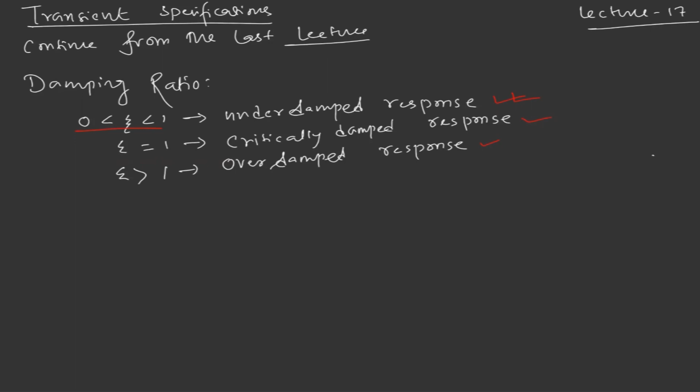This is the condition generally we use for aircraft control system. Now I'd like to highlight why we have to consider the damping ratio in this range. Let me highlight a few important points. The first point is faster response.

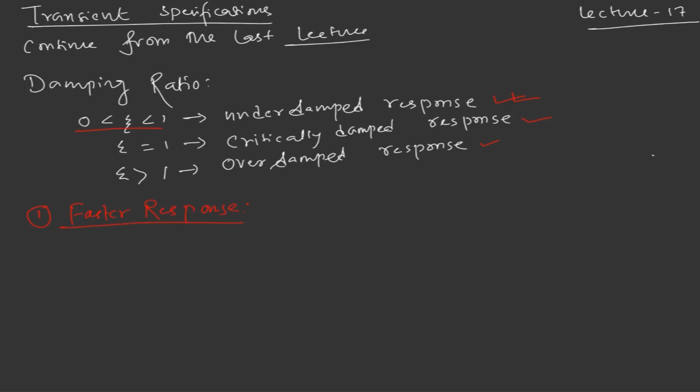Underdamped systems respond more quickly to changes in input or disturbances compared to overdamped or critically damped systems.

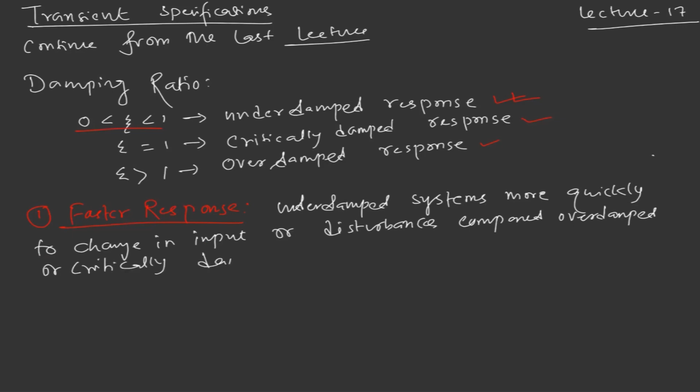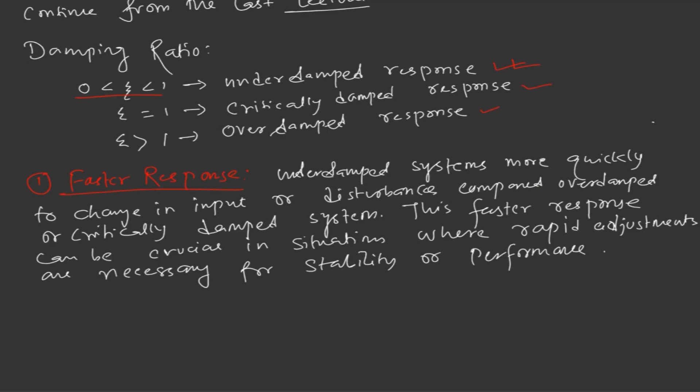This faster response can be crucial in situations where rapid adjustments are necessary for stability or performance. This is one reason why you have to consider the underdamped system.

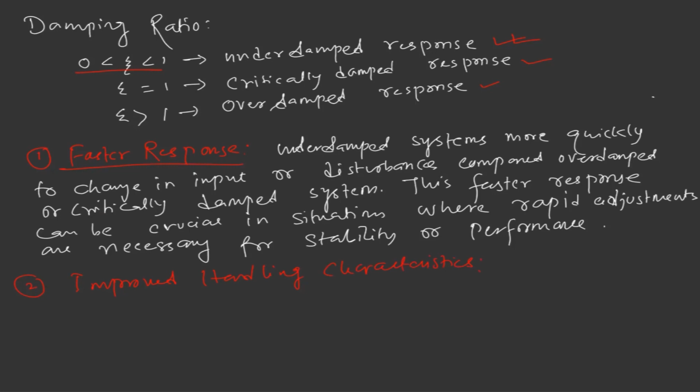Second, improved handling characteristics. Under this, let me write: an underdamped response can contribute to better handling characteristics.

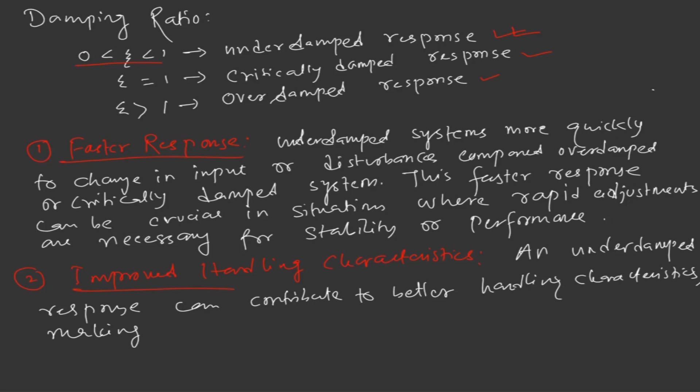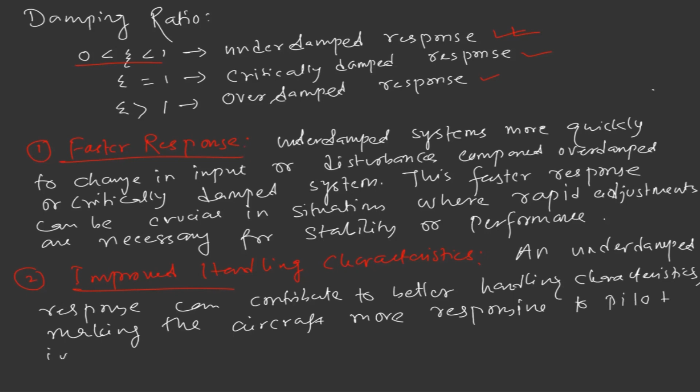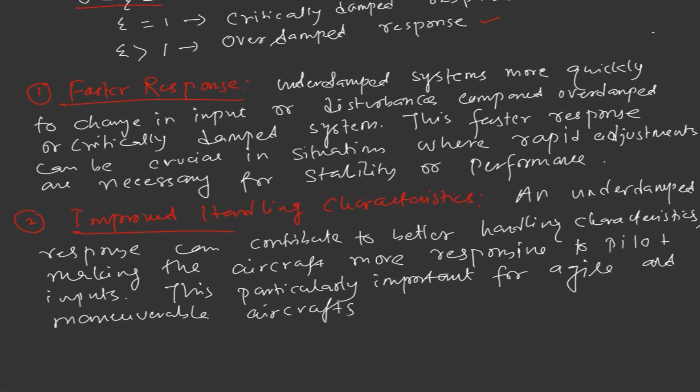This makes the aircraft more responsive to pilot inputs. This is particularly important for agile and maneuverable aircrafts. This is also a very important point, why you have to assume the damping ratio in that range.

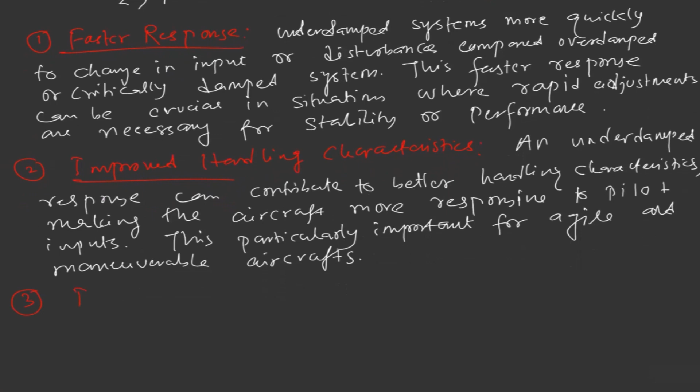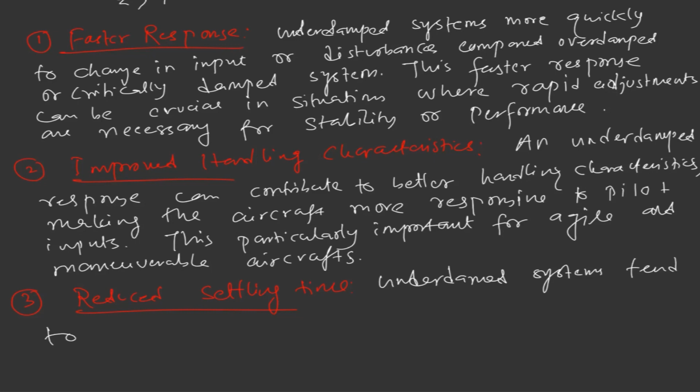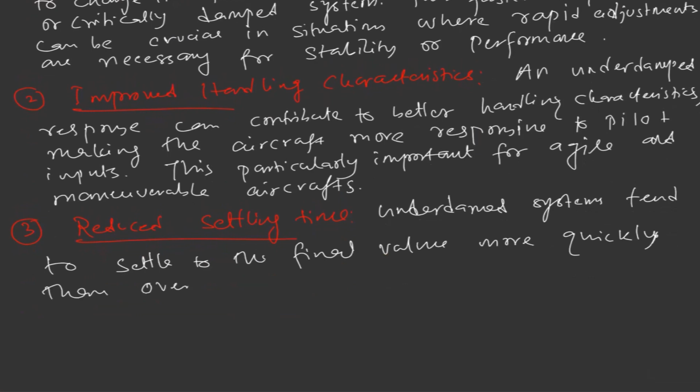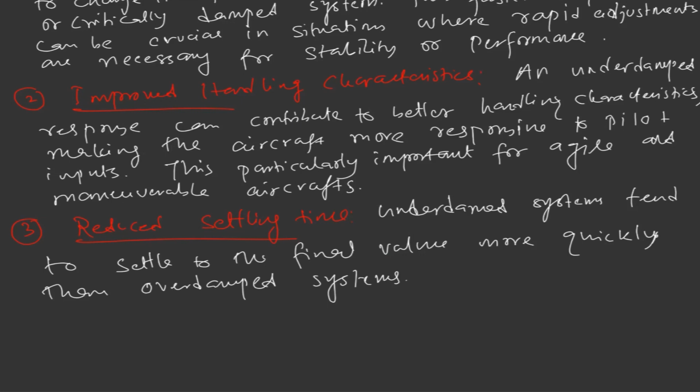Third point, reduced settling time. We'll discuss what settling time is very soon. Under this, underdamped systems tend to settle to the final value more quickly than overdamped systems. This characteristic is also desirable in applications where minimizing settling time is a priority.

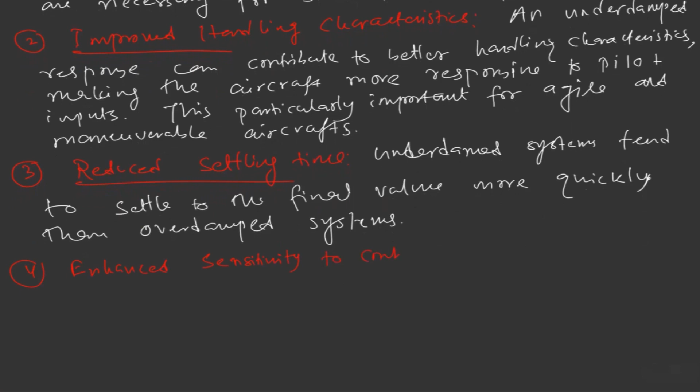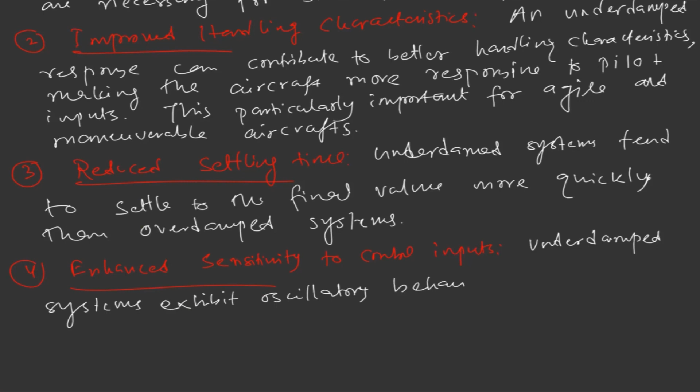Fourth point, enhanced sensitivity to control inputs. Underdamped systems exhibit oscillatory behavior. We've already discussed how this oscillatory behavior arises for the underdamped system.

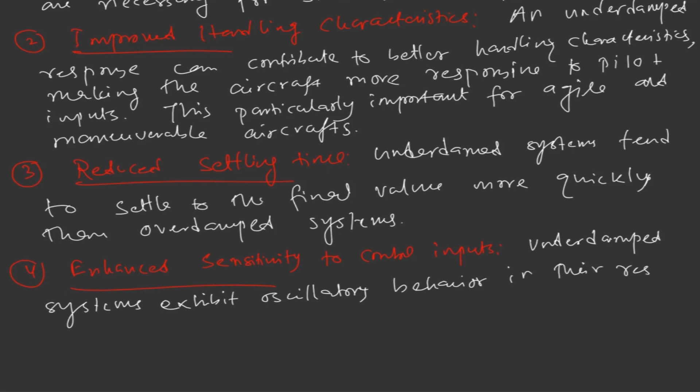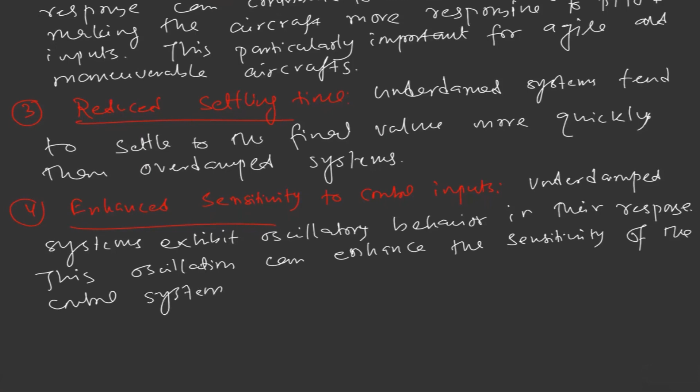These oscillations can enhance the sensitivity of the control system to small inputs. It's a very, very important point. So if you use this kind of system, the sensitivity of the control system to small inputs will be increased, enhanced, allowing finer control.

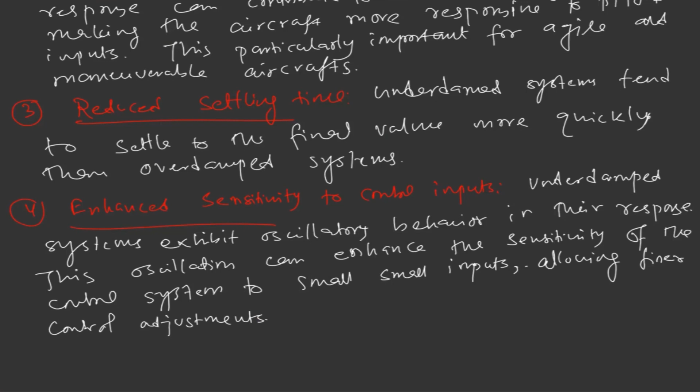And the fifth point we can write is stability margins.

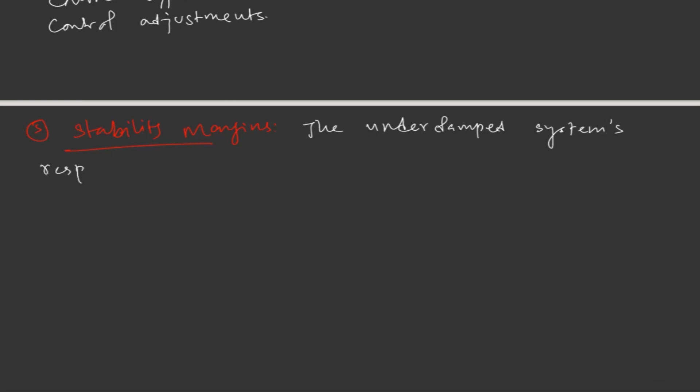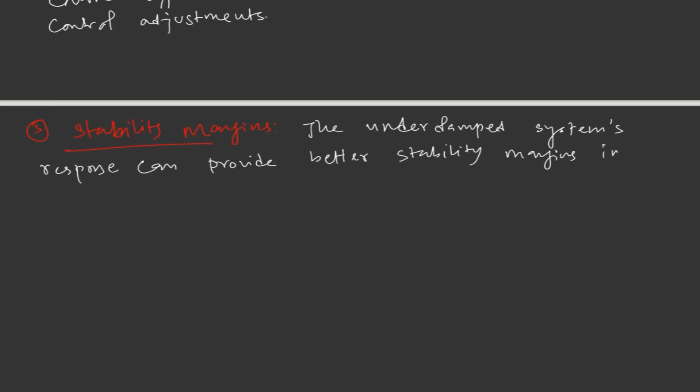The underdamped system's response can provide better stability margins in certain situations, making the system less prone to instability.

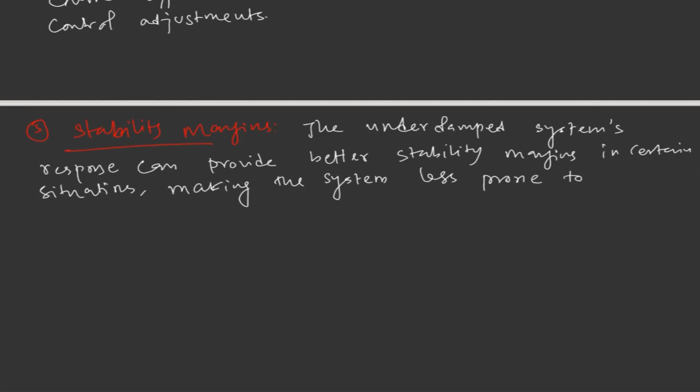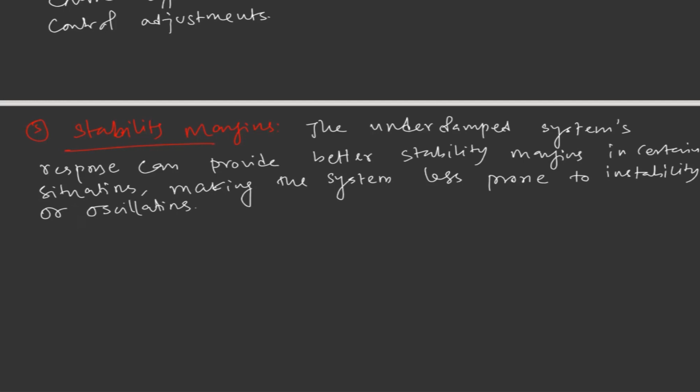So these are the points why you have to consider the damping ratio in this range. But it also depends on the situation in some cases; mostly we generally consider the damping ratio in this range. Another reason could be control authority: if you want a higher damping ratio, the control authority requirement will increase, because to provide that kind of damping to the system, you should have that kind of control power in the system. That is another possible reason.

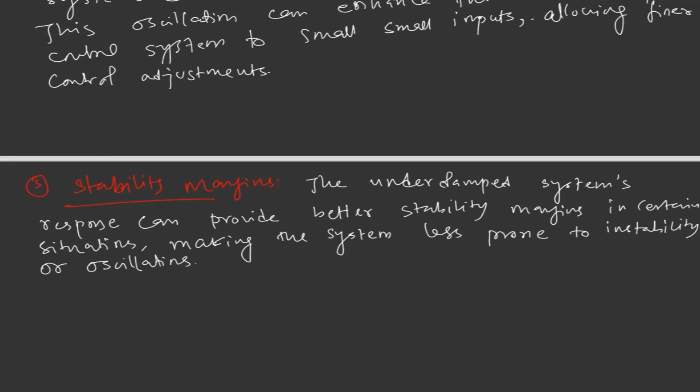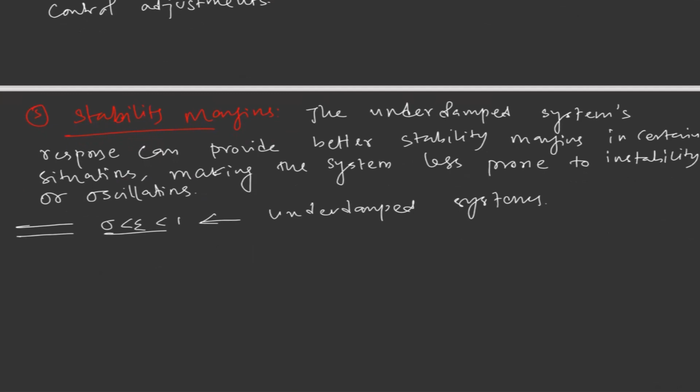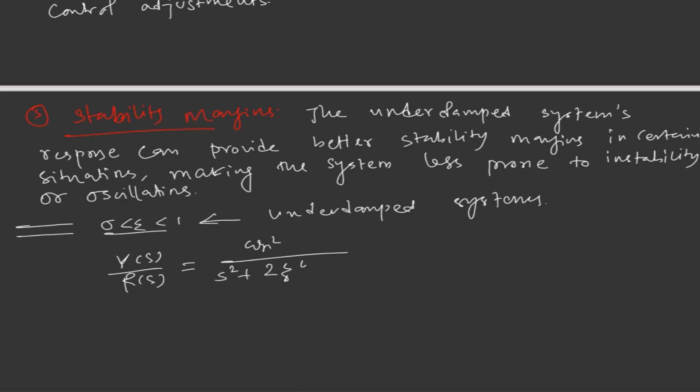Okay, let's go back to the dynamic system we considered before. We had the transfer function. Now onwards we'll consider the damping ratio between 0 and 1, the underdamped system. Based on the above points, we are going to consider the damping ratio should be in this range. Now, the transfer function we had is Y(s)/R(s) equal to omega n squared divided by s squared plus 2 zeta omega n s plus omega n squared.

As we discussed, we'll consider the step command in the system. So we'll assume R(t) equal to 1, a step command.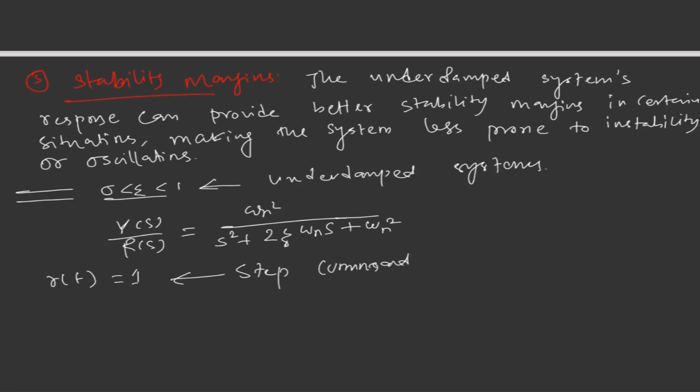We'll see how the response is going to be for this step command. If you take the Laplace transform, R of s equals 1 upon s. For this R(s), it's the step response because the command is 1 by s, a step command.

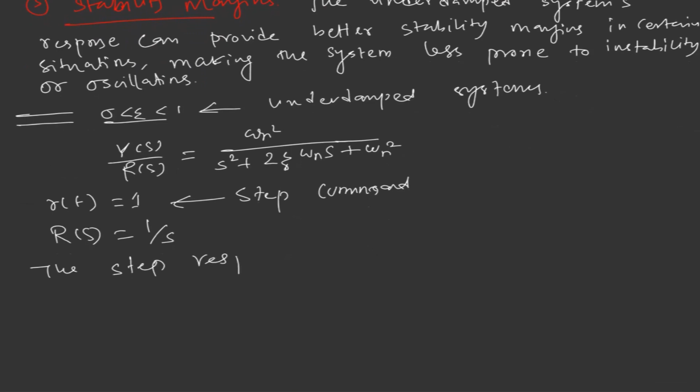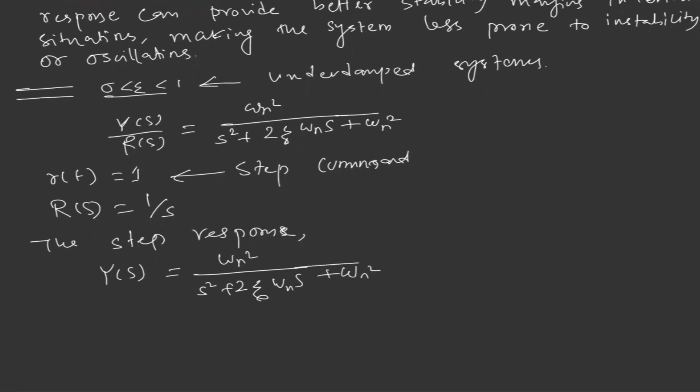The step response is given by y of s equal to omega n square divided by s square plus 2 zeta omega n s plus omega n square, into 1 upon s. Now if you use the partial fraction approach, we can expand y of s in a partial fraction.

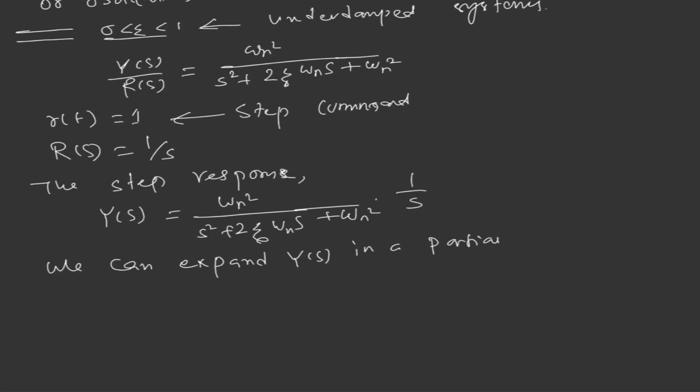y of s equal to 1 upon s minus s plus 2 zeta omega n divided by s square plus 2 zeta omega n s plus omega n square.

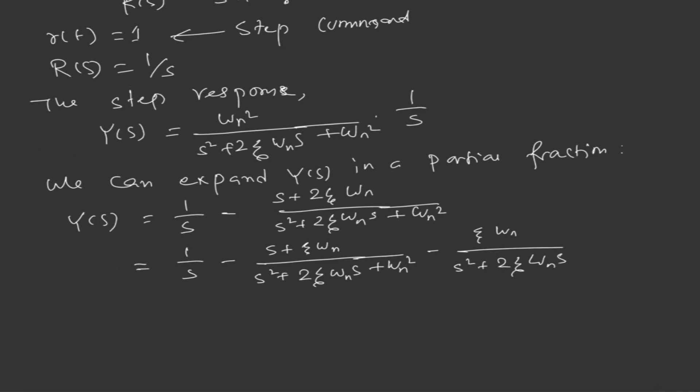Further, we can extend this term and write it as 1 upon s minus (s plus zeta omega n) divided by (s square plus 2 zeta omega n s plus omega n square) minus zeta omega n divided by (s square plus 2 zeta omega n s plus omega n square). So we can expand this expression into this form.

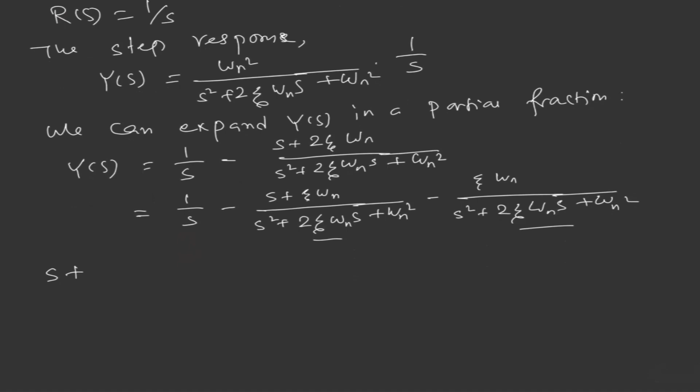Now let's compute the denominator part in this term, and we can expand that term again. We're trying to simplify this expression so we can apply the inverse Laplace transform and get a nice form. S square plus 2 zeta omega n s plus omega n square equal to, we can write s square plus 2 zeta omega n s plus...

...zeta square omega n square plus omega n square minus zeta square omega n square. We can write it in this form.

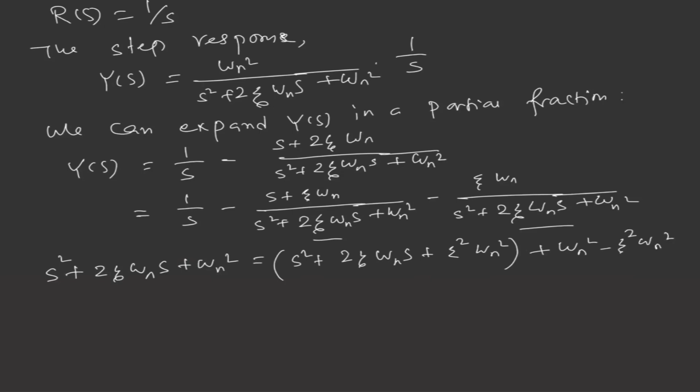From this we can further write (s plus zeta omega n) square plus omega n square common, taking 1 minus zeta square.

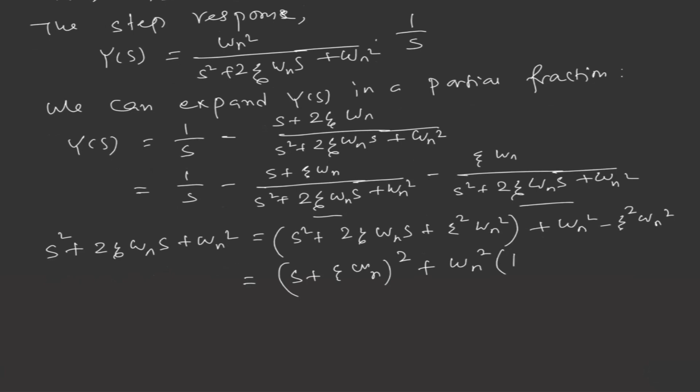From this we can write further, we already know omega d equals, for the underdamped system, omega n root over 1 minus zeta square. That's the expression we had. So if we take omega d square, we can write omega n square into 1 minus zeta square.

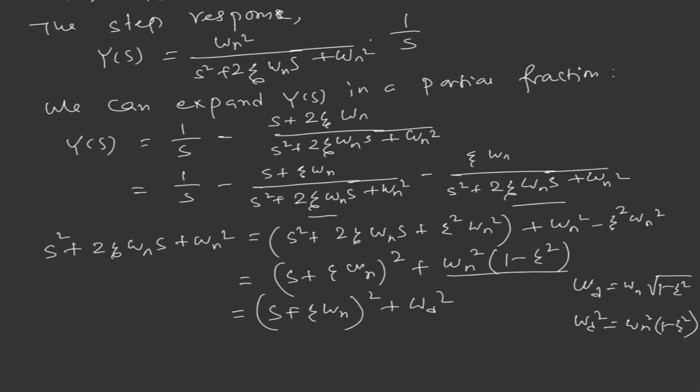So in place of this, we'll substitute omega d square: (s plus zeta omega n) square plus omega d square. Now if you substitute this expression in the equation, let me write this as equation number 1.

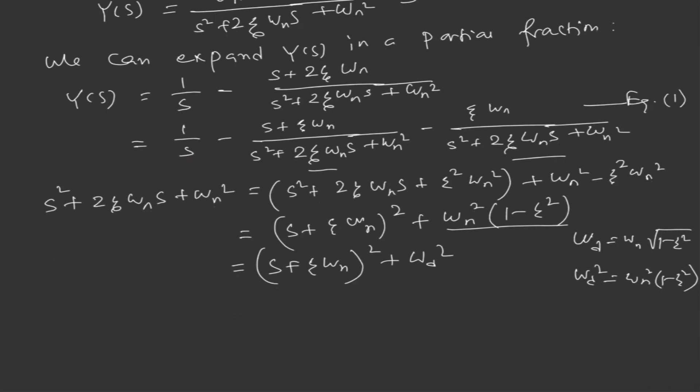Substituting the above expression in equation 1 yields: y of s equal to 1 upon s minus (s plus zeta omega n) divided by (s plus zeta omega n) square plus omega d square.

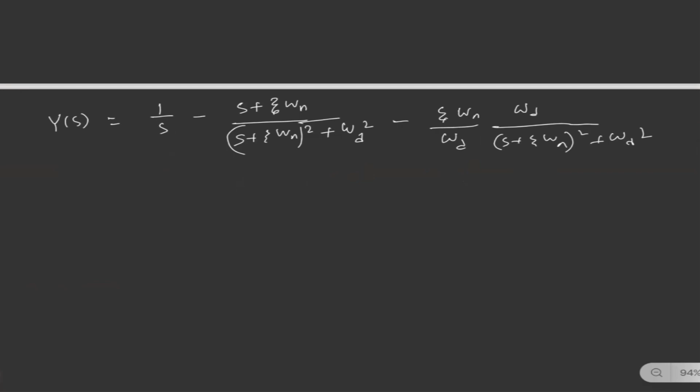...and minus zeta omega n by omega d, over (s plus zeta omega n) square plus omega d square. So we multiply omega d here on both sides, in the denominator and numerator, to make things in a more simplified form.

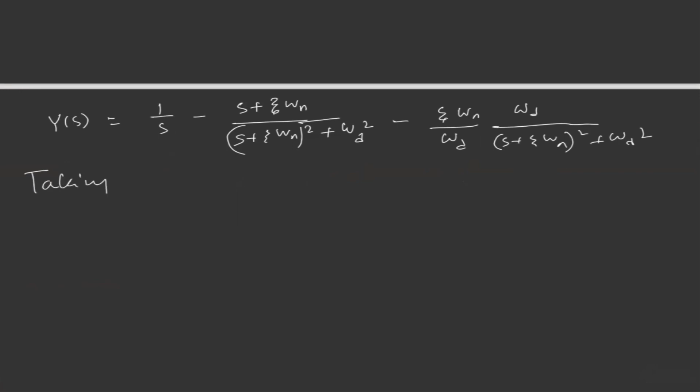And taking the inverse Laplace transform yields...

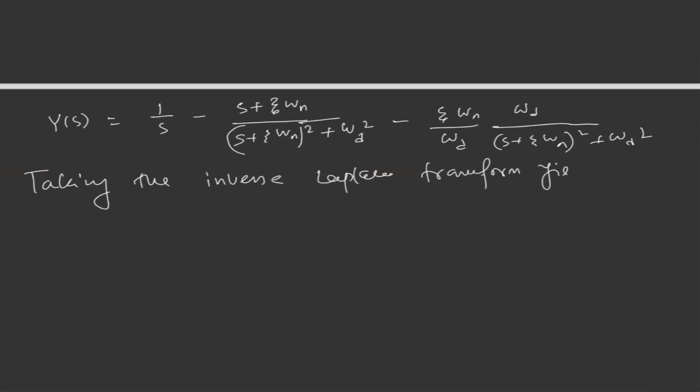...we get y of t equal to 1 minus e to the power minus zeta omega n t, times cos omega d t, plus (taking minus common, so it becomes plus) zeta omega n divided by omega d, times sine omega d t. So this is the expression.

This is the expression for step response in the time domain. So here basically we have used the Laplace transform of...

e to the power minus a t sine omega t. If we take the Laplace transform, we get omega divided by (s plus a square plus omega square). And if we have e to the power minus a t cos omega t, if we take Laplace transform, we get (s plus a) divided by (s plus a square plus omega square).

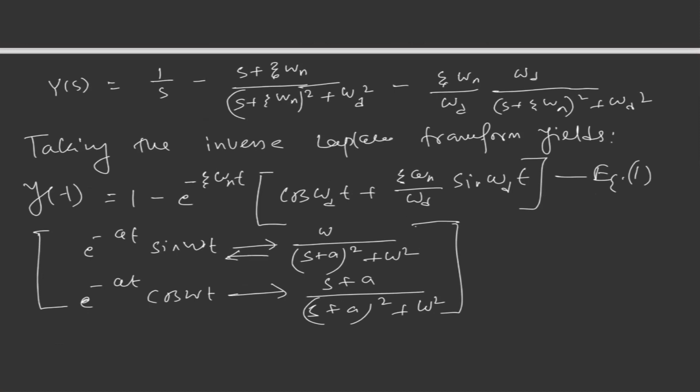So if you take the inverse Laplace transform, you'll get this expression. These are the terms we have used in equation number 2, and equation number 1.

Now we have our step response of the second order system, and on this system we'll be defining the specifications. What are these specifications? Let me define them, then we'll find the expressions for those specifications.

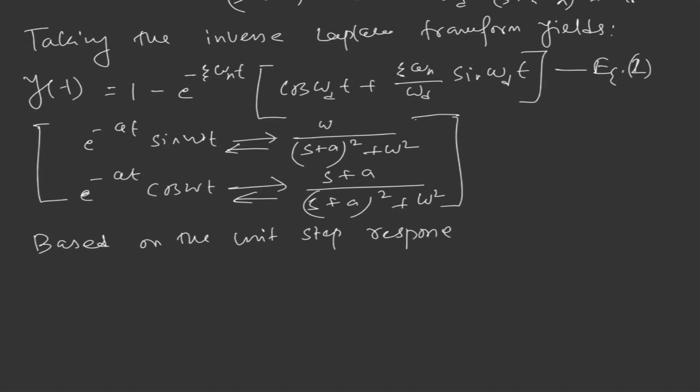Based on the unit step response, why is it called unit step? Because we have taken r of t equal to 1 unit step. This is the expression we have taken, that is our unit step. For unit step response, a number of different specifications may be given.

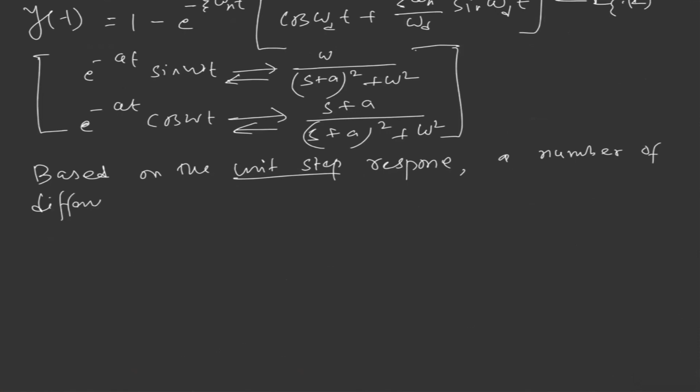As the first specification we are going to derive is rise time, which is denoted by TR. Let me define what this is: the time taken for the step response to first reach the final value.

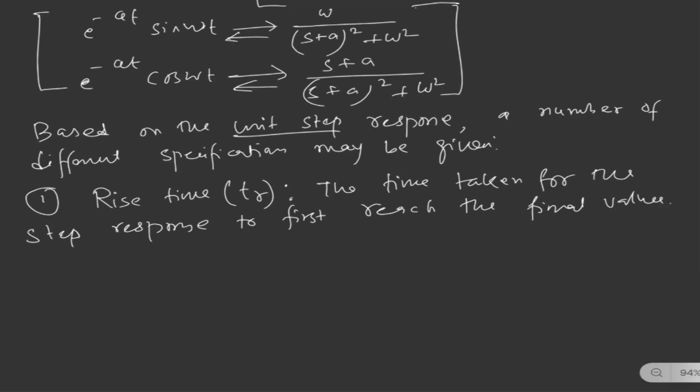In a response plot, I will be showing how it looks, how we'll find this rise time. Just after some time, we'll be showing this.

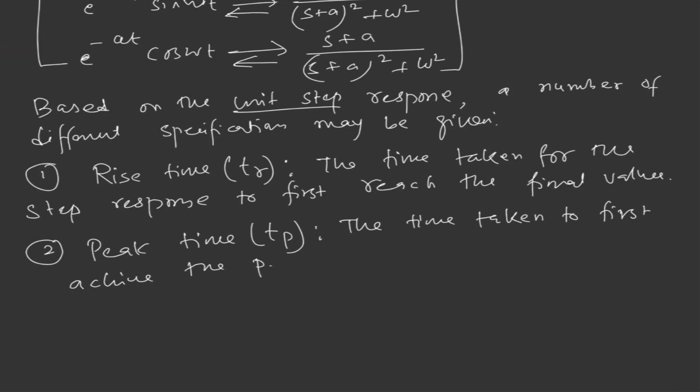Another specification is peak time, TP. The time taken to first achieve the peak value, or the peak response.

And another specification we have is maximum overshoot, denoted by MP. The maximum percentage overshoot from the final value.

Fourth specification we'll have is settling time, TS. The time taken for the output to get within 2% of the final value. We'll assume 2%. Maybe in some cases different systems use a different percentage, but we'll use 2% of the final value and stay there.

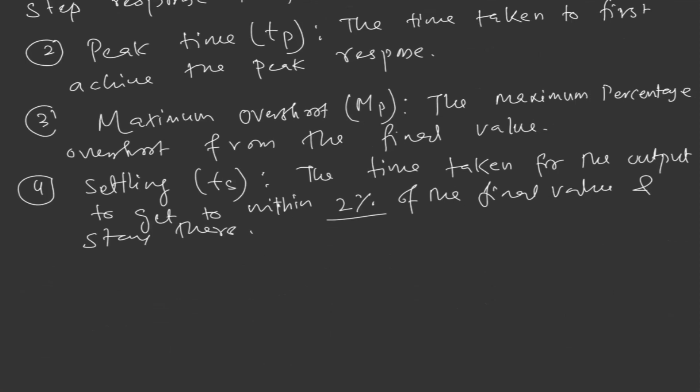Now we'll see how this specification can be seen in the response plot. Let me go to a new figure. Let's assume we have a response, this is the time axis, and the step response y of t.

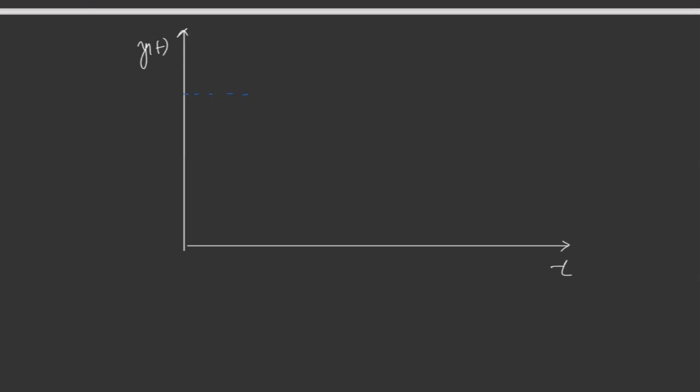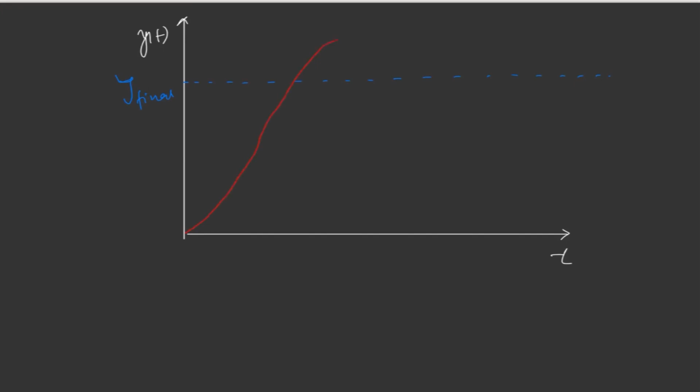And since we are assuming a step command, we are having the final value, my aircraft should maintain this final value. For example, let me write y final. Okay, this is y final. And the response I'm having, starting from here, goes like this, and it is something like this.

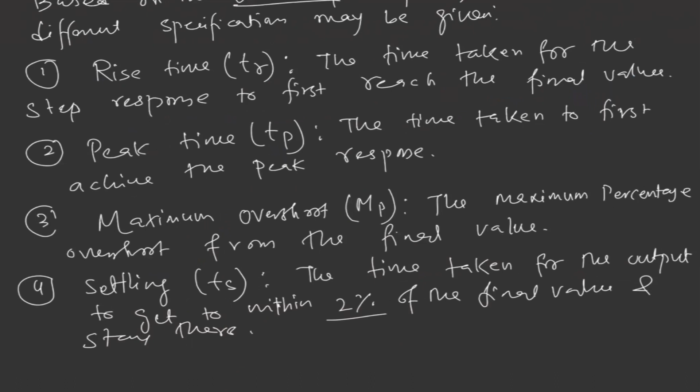Now, as per the definition, first let's go to rise time: the time taken for the response to first reach the final value. So here, this is our final value, this is the response plot, and it first reaches the final value here. So this time taken from this point to this point we can denote by TR.

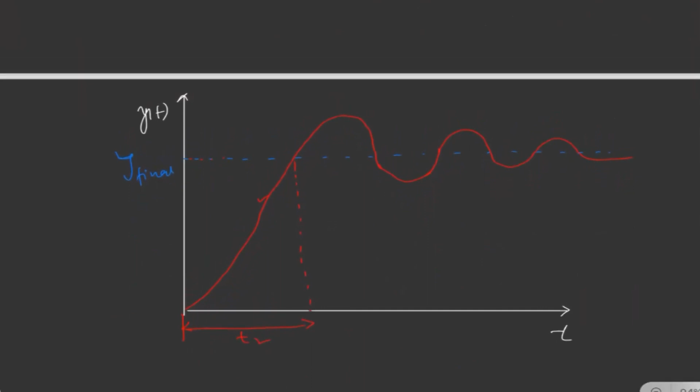And the second is peak time, the time taken to first achieve the peak response. So this is our peak response here, the maximum peak. The time it takes to reach this peak, we can denote as TP, peak time.

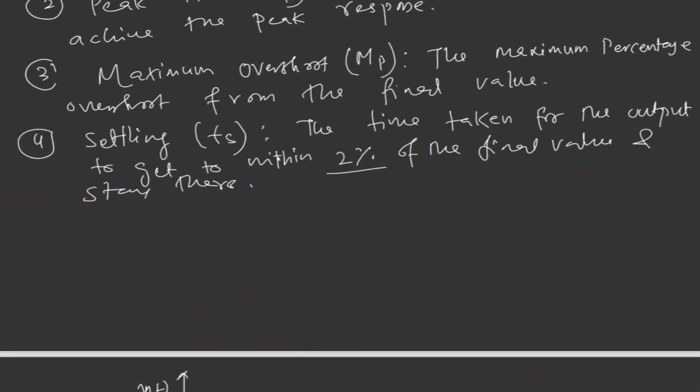And now let's move to the maximum overshoot, the maximum percentage overshoot from the final value. So in this case, this is our maximum overshoot from the final value, and we can denote this as MP.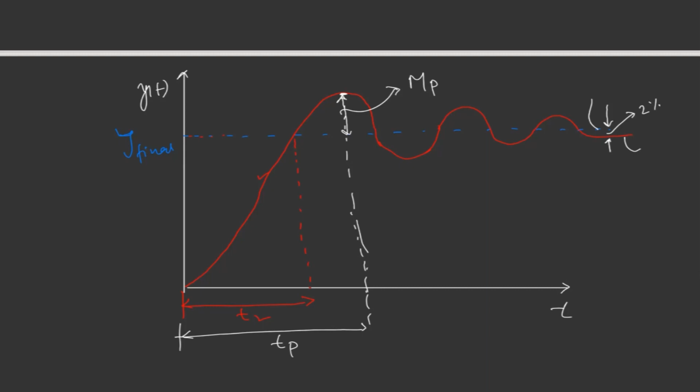Now the settling time, the time taken for the output to get within 2% of the final value. So let's assume this is the value, 2% from the final value. This is the response and this is the final value, and between these, 2% error is there. So once the system reaches this value, that's the value we get. At this time, the time it takes to reach this value, we denote this as TS.

So this is how we can define the specifications for a response. Now, as a control engineer, you will modify these specifications so that you can fulfill your mission objective. If you want to fulfill your mission objective very quickly, we have to modify the settling time TS. Or if you want less overshoot, less oscillation in the system, we have to work on the maximum overshoot and how we can modify it. Or if you want to reach the final value very fast, we have to modify TR. So how the control algorithm should be designed so that you can modify this response and get a better response, a better objective - this is how we'll be designing the control system.

Let's stop it here. We'll continue from the next lecture on how we'll be coming up with the expression of this specification using these definitions. Thank you.